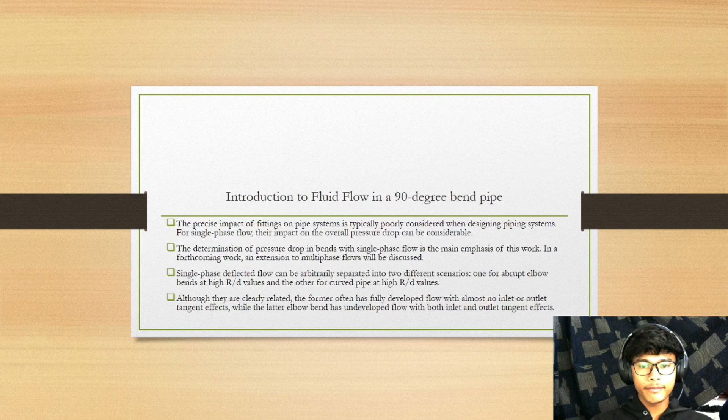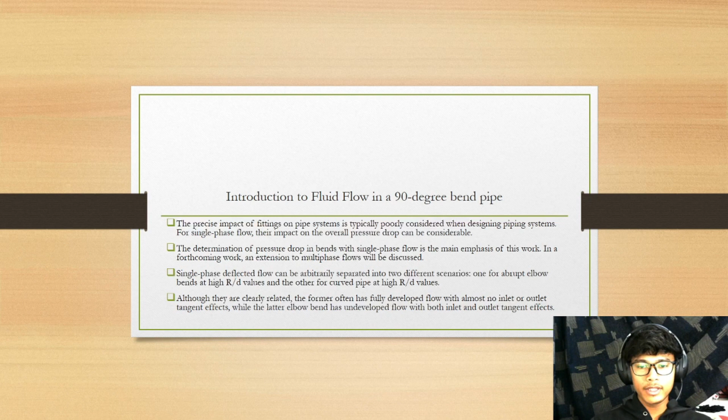Single-phase deflected flow can be arbitrarily separated into two different scenarios: one for abrupt elbow bends at high R/d values, and the other for curved pipes at high R/d values. Although they are clearly related, the former often has fully developed flow with almost no inlet or outlet tangent effects, while the latter elbow bend has undeveloped flow with both inlet and outlet tangent effects.

Theory of fluid flow in a 90-degree bend pipe.

The measurement and forecasting of pressure drop in curved pipes and elbow bends for laminar and turbulent single-phase fluid flow are examined. Both theoretical and empirical relationships can be used to predict the pressure loss for curved pipes in laminar flow. An empirical relationship can be used to predict the transitional Reynolds numbers.

Turbulent flow in curved pipes can only be theoretically predicted for large bends, but there are a large number of empirical relations that have proved to be accurate.

Elbow bends have proven to be difficult to both measure and represent the pressure loss. Methods of overcoming such problems are outlined. There was no reliable method for theoretically predicting pressure drop in elbow bends.

Experimental measurements show considerable scatter unless care was taken to eliminate extraneous effects. Reliable data are highlighted, and an empirical method is proposed for calculation of pressure drop in elbow bends.

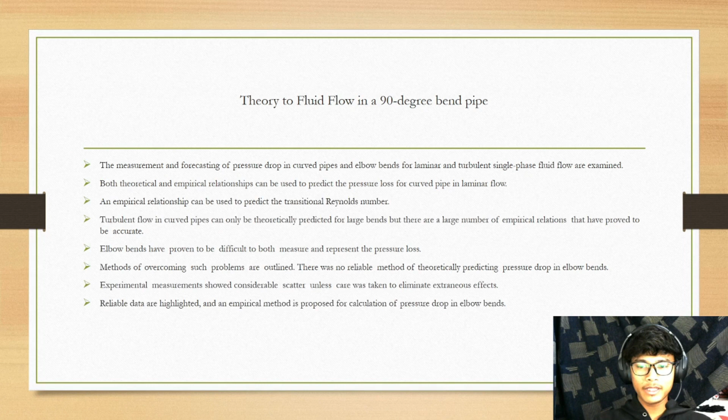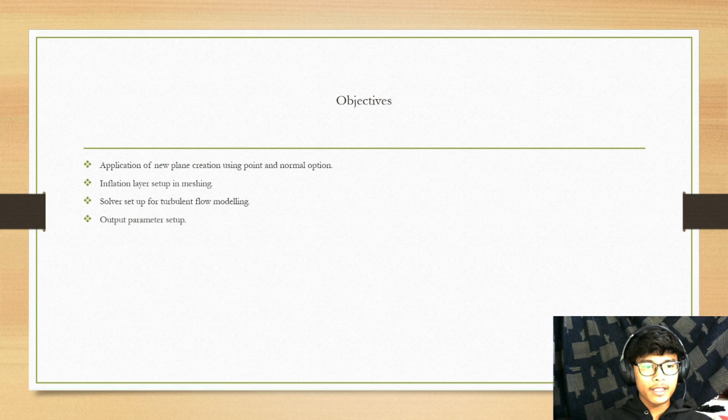For the objective: application of new plane creation using point and normal options, inflation layer setup in meshing, solver setup for turbulent flow modeling, and the last one is output parameter setup.

When we want to start our work, first we need to run Workbench as administrator. After the workbench is open, double click on Fluid Flow (Fluent). After that, right click geometry and press new Design Modeler.

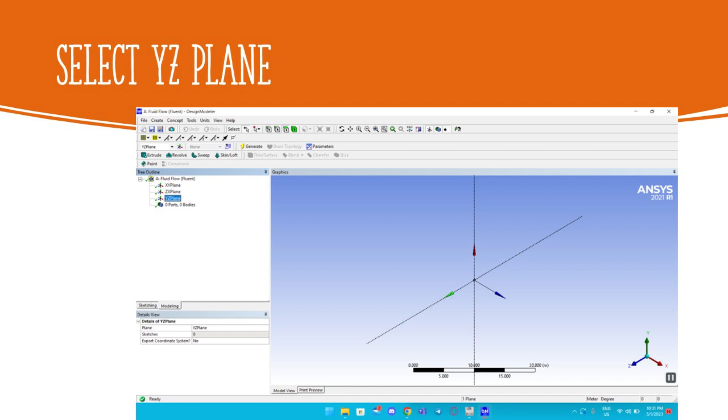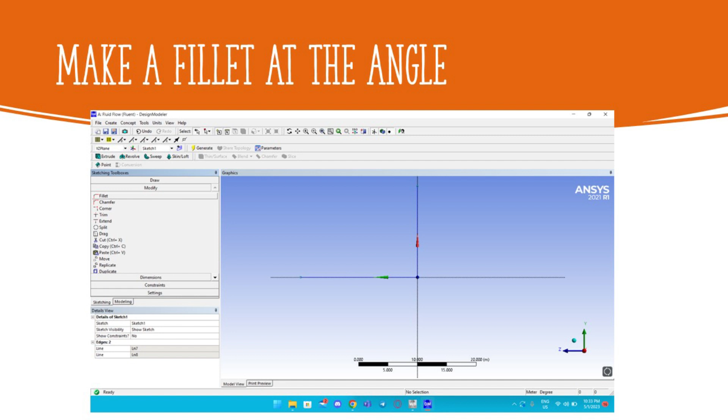Select the YZ plane, click sketch, then press line. Draw a line at the Y and Z axis and then make a fillet at the angle. Press modify, then choose fillet.

After that, we need to enter the dimension on each line and the fillet. Click dimension, then choose general. After that, click on the line that you wanted and enter the specified length. Repeat the same step for the fillet radius.

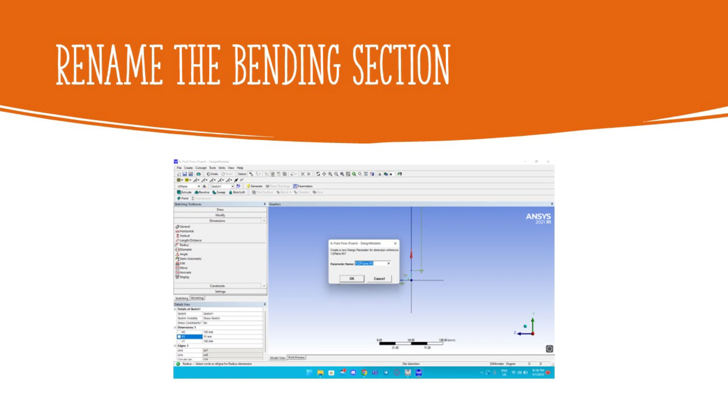Then rename the bending section. After that, create a new plane, choose create new plane, and then choose from point and normal.

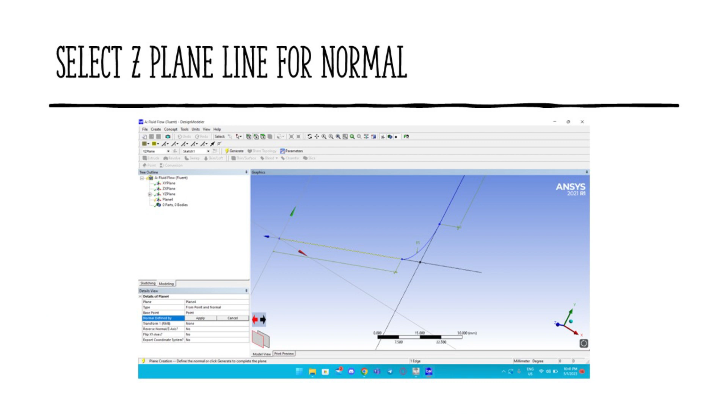Select the point at the end of the H1 line as the base point, and for defining the normal, choose the H1 line. After creating the plane, click the YZ plane, then right click on sketch 1 and choose always show.

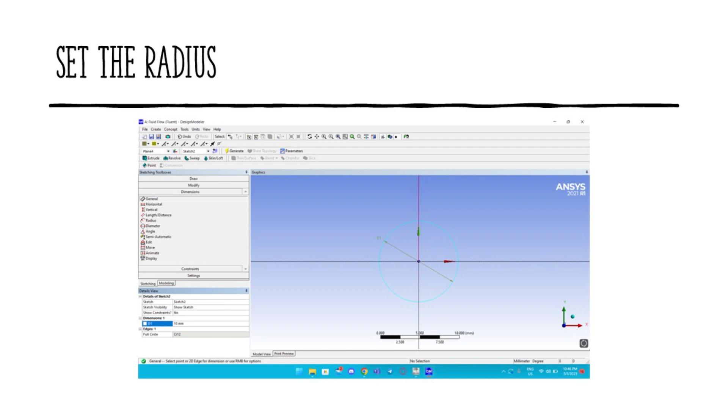Go to plane 4 and sketch a circle at the end of line H1. Enter a radius of 10 mm. Select sweep and choose the circle as the profile and the H1 line as the path, then generate.

After we've done creating our geometry, we will do the meshing. Right click on mesh and press edit. We will first generate the default mesh by right clicking on mesh and choosing generate mesh.

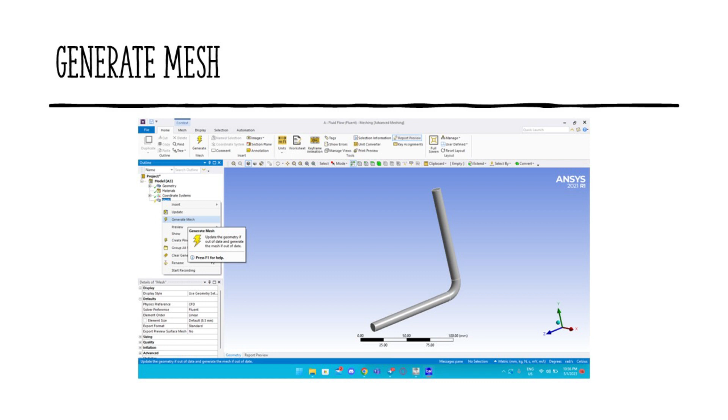After that, right click on mesh once again, go to insert and choose sizing. Choose the area at the bend and change the element size to 0.5 mm, setting the behavior to hard.

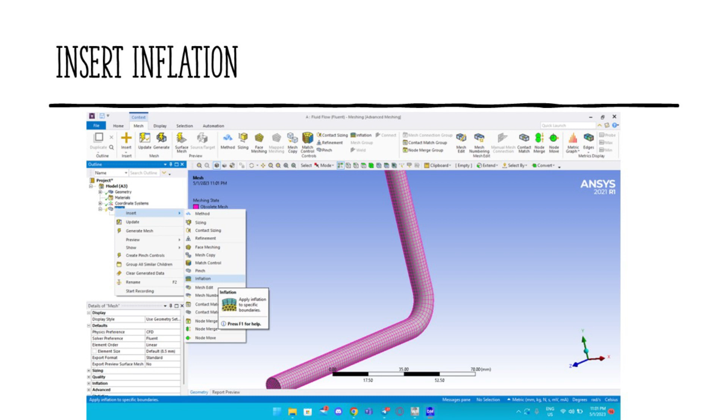Once again, right click on mesh, go to insert, and choose inflation. Select the whole body as the boundary and set max layer to 4. After we're done, once again right click on mesh and choose generate mesh.

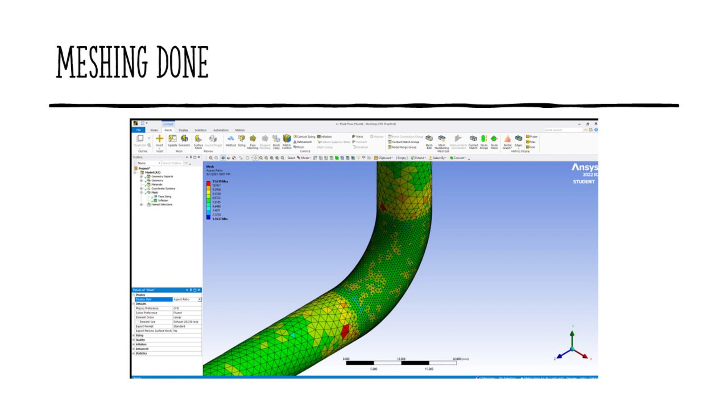When we're done generating the mesh, change the display style to skewness and max aspect ratio for analyzing the mesh. Right click on the mesh once again and choose update. After that, click file and choose close meshing.

After we have done meshing, now we open Workbench and right click on solution. Set up all the velocity and the k-epsilon, and now we are done. We can start the calculation.

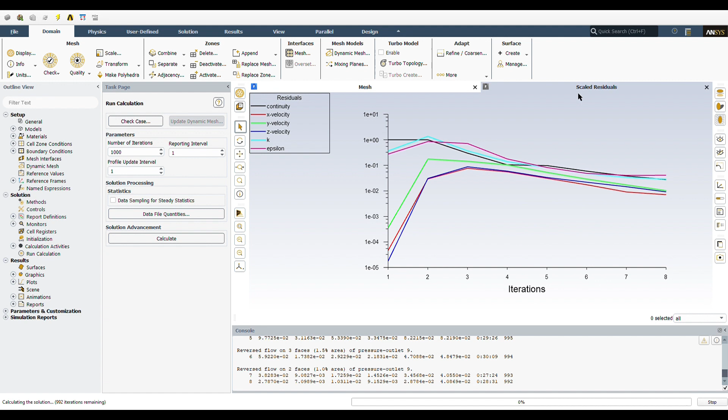After we have done the calculation, now we can get the result. After every step is done, we now have got the result. We can check the result by clicking on the result menu.

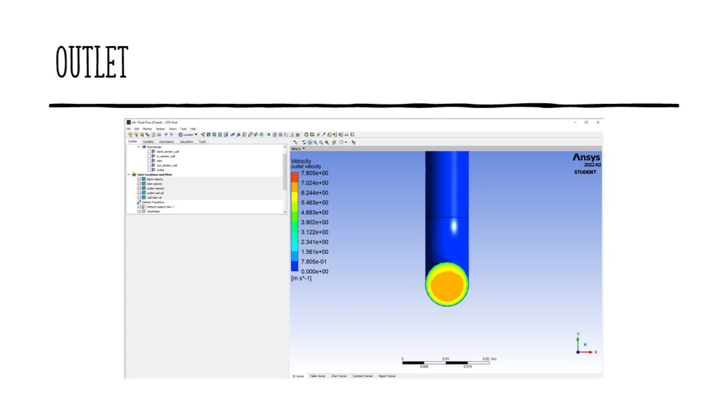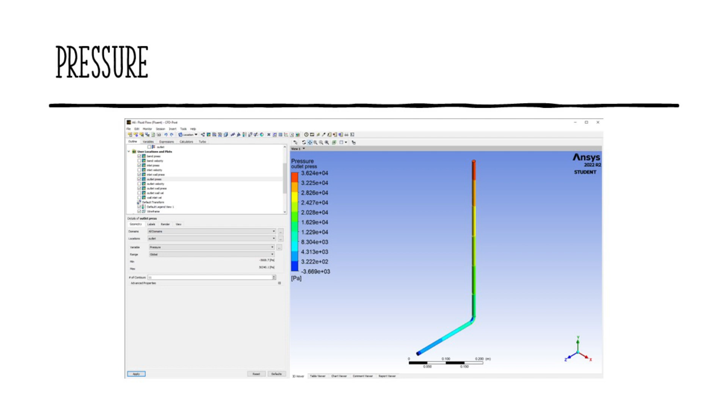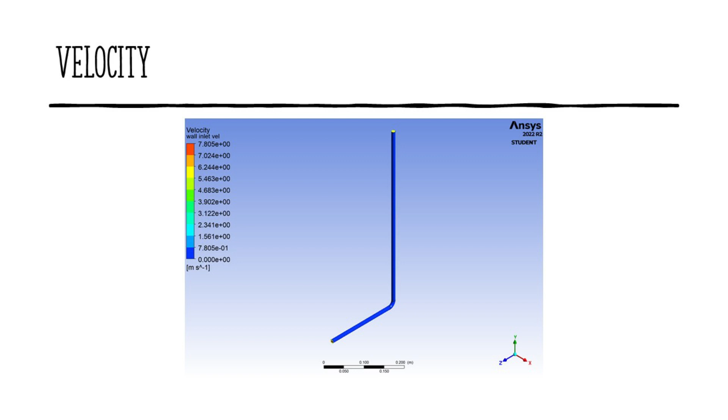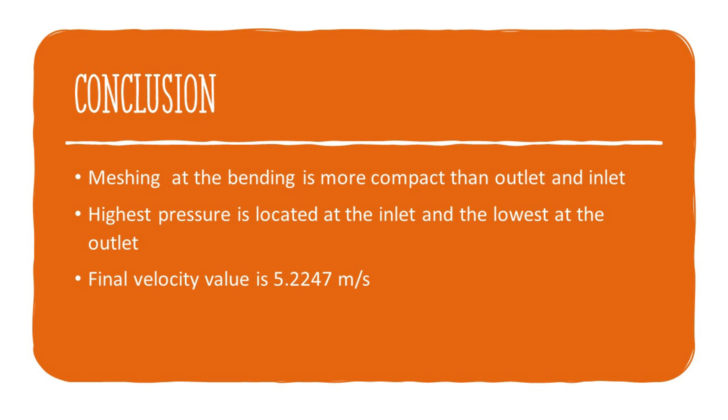The highest pressure is located at the inlet and the lowest pressure is located at the outlet. After done calculating, we get that the final velocity is 5.2247 meters per second.